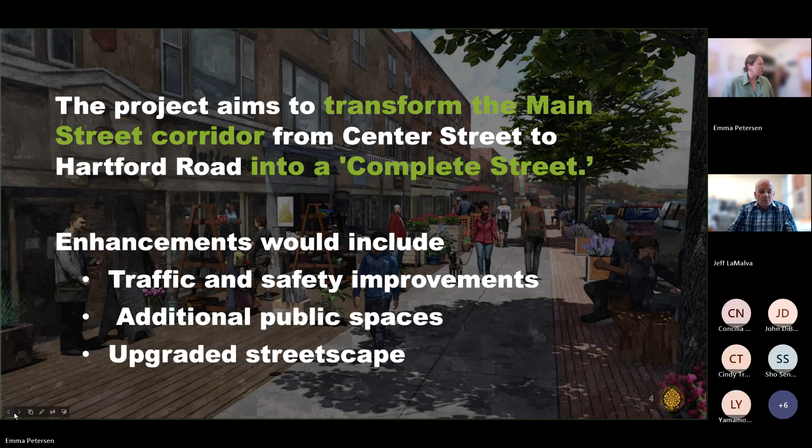There are four main goals of this project that I'd like to address to sort of level set before we get into details of the project itself. The first one being there is a need to modernize some of the infrastructure that we have downtown. There are certain elements that are in need of improvements, that I'll get into a little bit more detail later on, that are at the end of their useful life, and there are upgrades needed for downtown.

The second is improving traffic safety. Unfortunately, this section of Main Street in the downtown corridor has been identified as an area of significance in terms of the frequency and severity of crashes. And there are certain design elements that can be incorporated into the road design to address these concerns.

The other goal of this project is to advance connectivity and accessibility, which means accommodating different types of road users for our downtown district. We have a lot of visitors, a lot of people that love our downtown district, and being able to provide infrastructure that would allow people to utilize public transportation, being able to bike downtown or walk downtown, in addition to having a comfortable driving experience, is something that we strive to accomplish.

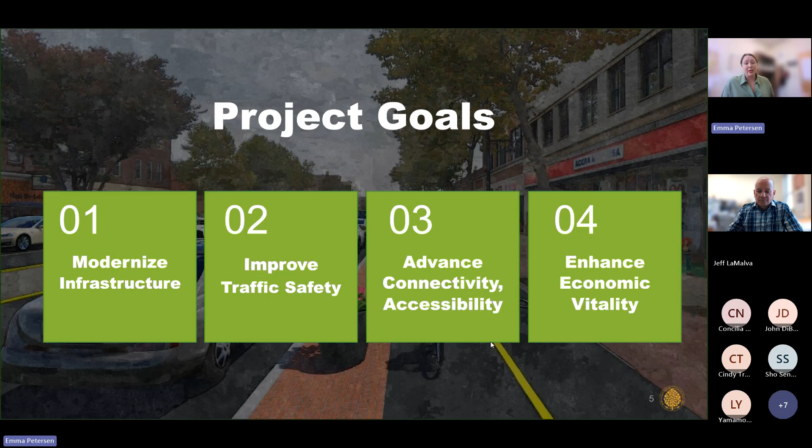And lastly, enhancing economic vitality for our downtown district. I've identified a series of investments that the town is getting ready to make downtown, and this also provides an opportunity for us to make downtown even more of a destination to visit.

So I'd also like to address some frequently asked questions as I go along, and this will just be kind of peppered into my slides here, but a couple to start off with are: does the plan remove parking spaces? No, the plan does not remove parking spaces downtown. There's no net change in on-street parking spaces, and currently there is an increase in off-street parking spaces incorporated in the draft design. Another question that we get is, are the plans set in stone?

No, this is an ongoing process. This virtual session tonight is just part of a series of engagement sessions that we've been hosting to collect feedback from residents, from businesses, from other downtown stakeholders. And all of this feedback tonight, and through these other sessions, is going into updating this draft design.

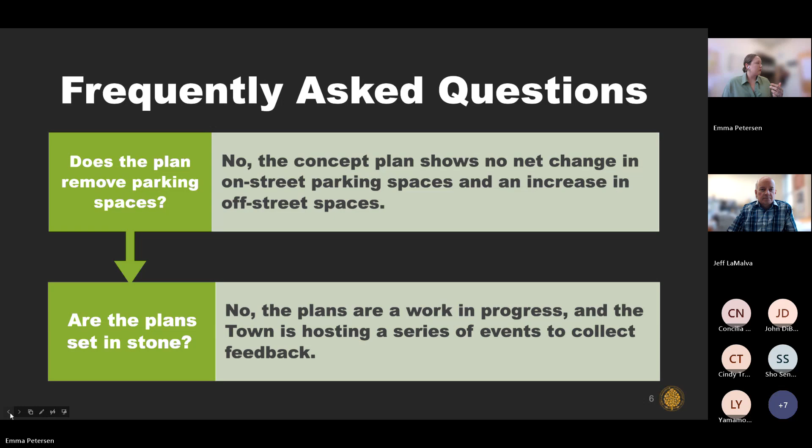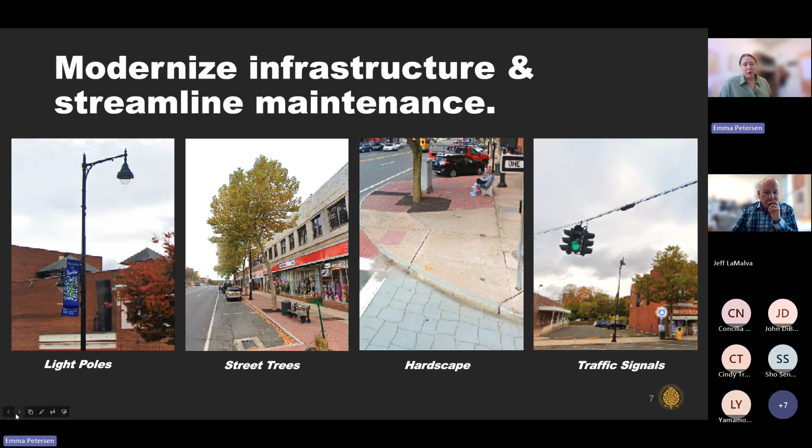To get a little bit more into those project goals, the first one is modernizing infrastructure and streamlining maintenance. There are certain elements in need of upgrading downtown, including the light poles, street trees, hardscape, and traffic signals. Some of these elements have not been updated since they were installed over 30 years ago and are coming to the end of their useful life, one of which being the traffic signals. Because of their age, they are not coordinated in the same way anymore. Upgrading these and incorporating new coordinated signals would enhance traffic flow and serve to add to the maintenance of our downtown district.

There's also our other goal of improving traffic safety. The downtown Main Street corridor has been identified as an area of significance in terms of crashes. There are well-researched design elements that can be incorporated into the streetscape layout to improve these conditions. One is known as a road diet, or roadway reconfiguration, which generally translates to having a 4-lane roadway and converting it to a 3-lane roadway, also through the incorporation of dedicated turn lanes. These are two very common elements that can have great results.

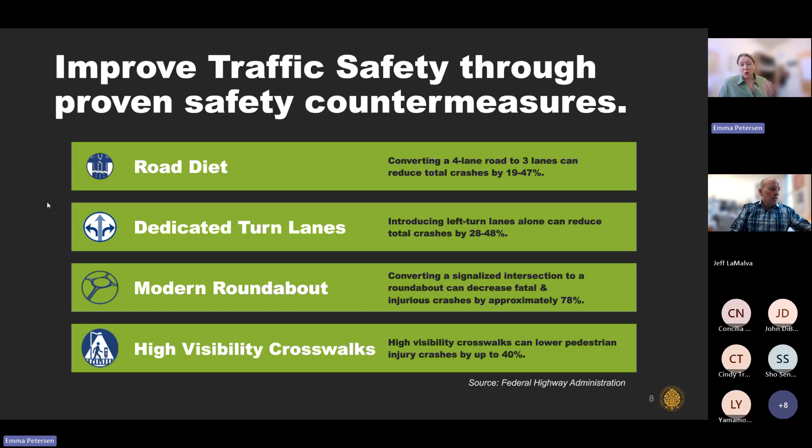A couple of statistics: converting a 4-lane road to 3 lanes can reduce total crashes by 19 to almost 50%. Introducing left turn lanes alone can reduce total crashes by 28 to 48%. This is from the Federal Highway Administration. Other elements that can be included are modern roundabouts versus rotaries - we get that question a lot. There are some key design differences there, but modern roundabouts also help reduce crashes. Another element is high visibility crosswalks, specifically for reducing pedestrian injury crashes. All of these elements are incorporated into the draft design, which we will get into in a little bit.

Another question we have: can large vehicles navigate a roundabout? Yes, large vehicles can navigate the proposed roundabout. They have been designed to accommodate emergency vehicles and large trucks. Our engineering team has done calculations and talked with stakeholders to ensure this. Another question we get is how would a roundabout compare to others in the area? The proposed one is larger than others in the area as well.

Another question that we get is, will the road diet cause traffic delays? No, that is not the intention. There is the coupling of upgrading the traffic signals and improving the roadway design so that traffic would flow smoothly down Main Street, and there would be no anticipated changes in travel times down Main Street.

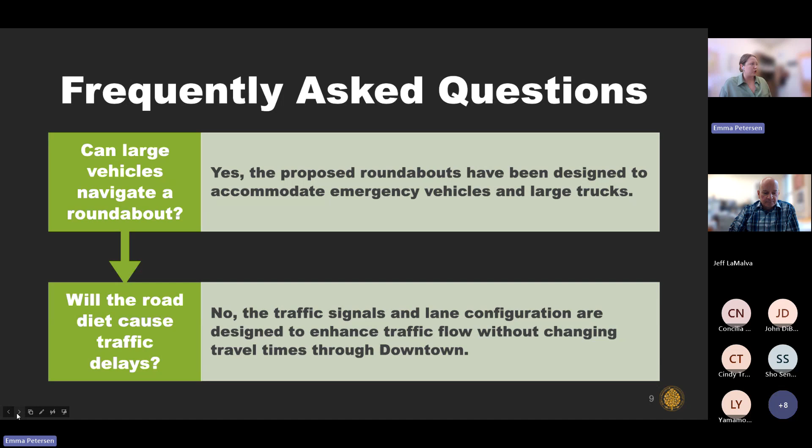Third and fourth of four goals here, to get into this in more detail: we talked about advancing connectivity and accessibility, and another way we view that is accommodating different types of road users. I talked about upgrades needed to the infrastructure downtown. There is a certain policy that the board of directors adopted in town called the Complete Streets Policy. The basis of that is that when the town looks to make improvements to our roads, the Complete Streets Policy outlines the principle that we should also look at the design of those roads and allow for opportunities to incorporate infrastructure that would allow for other types of road users - very specifically connected to pedestrians, people walking, cyclists, people biking, or using public transportation, making sure there are elements that accommodate those different things.

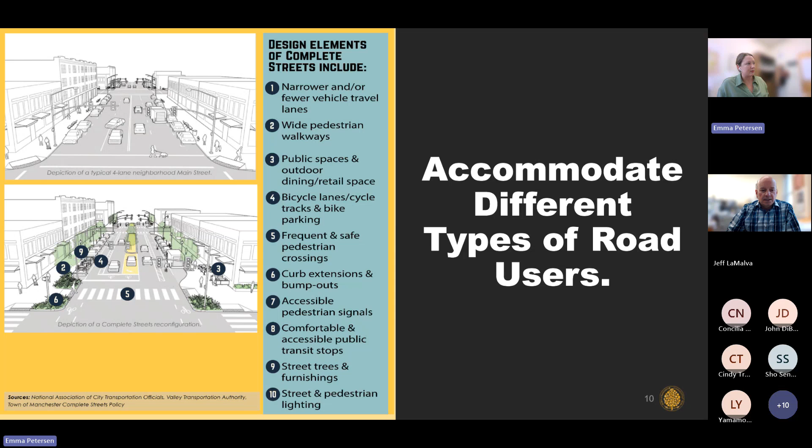So, a couple of FAQs here. There is specific bike infrastructure that's incorporated into the draft design. We do get the question, why is the cycle track included in the plan?

Very specifically connected to the goals of this project, part of the goals is to accommodate different types of road users, providing safe, dedicated structures for cyclists and other human-powered transportation, things that are slower moving than cars but separated from pedestrian traffic, like scooters or skateboards. Providing that dedicated infrastructure allows a safe way for other users to travel.

We also get the question, who would use the cycle track? We certainly see a connection with recreational cyclists. The proposed cycle track would connect with two of our popular trails in town, the East Coast Greenway and the Cheney Rail Trail.

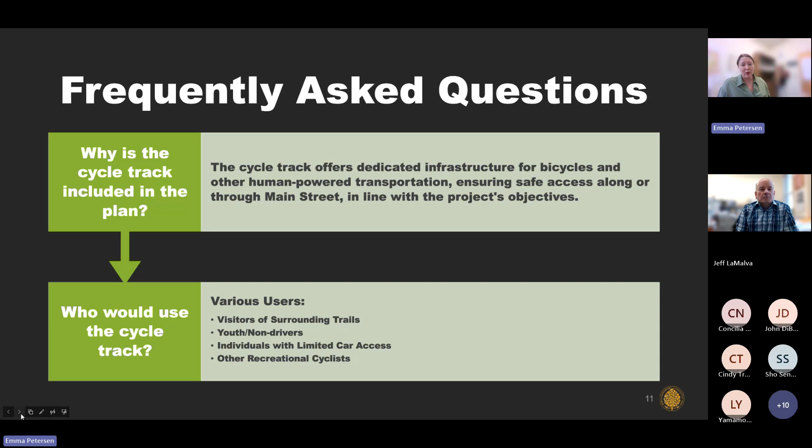So we absolutely see a connection there about people traveling from those trails to the downtown. But there are other use cases incorporated into this. We see Manchester youth being one that could utilize this, people too young to drive yet, or middle school students traveling to Bennet Academy. We also see a connection to non-drivers for any particular reason, or those with limited access to cars. There is also frequent bus transit on Main Street — having cycle infrastructure could be a way for people to get to bus stops as well.

The last item here, our last goal, we talk about enhancing economic vitality. All of these things I've mentioned are significant investments in our downtown district that address maintenance, but also address improvement. Part of those improvements could also incorporate more public features downtown.

As we look to add these different design elements, what are some other things that could add placemaking value to downtown? These could be things like outdoor dining incorporated onto wider sidewalks, decorative lighting that creates a safe walking environment but also adds aesthetic value, additional landscaping, public seating, things like that. All of these elements can be incorporated into the project so that we are not only maintaining the asset we have, but also providing improvements.

Just a couple last FAQs that we've gotten through our other events: will this proposed plan harm downtown events? No, that is not the intention at all. We are working closely with the Manchester Road Race Committee to ensure that any proposed design wouldn't interfere with the logistics of the race. There's no reason to see why another event like Cruising on Main wouldn't continue to be able to take place on our Main Street.

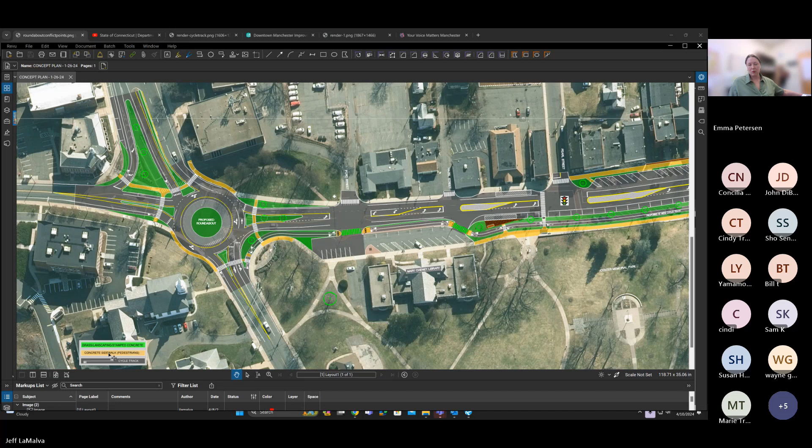For example, everything you see in green here is not necessarily grass - it could end up being grass, landscaping, stamped concrete, or another surface material. While I'm on the legend, anything you see in orange is a proposed sidewalk, and lastly, the gray pavement colored here with the bike symbols is a proposed cycle track, which we're going to get into in a bit more.

We're going to start out at the northern end of the project. The Lincoln Center is right here, Center Congregational Church here, and Mary Cheney Library here. One of the most discussed parts of the plan are the two roundabouts at each end of the project. Here we see the one at Main and Center Street.

There are a few reasons we are proposing roundabouts at these two locations, with the most important being safety. It's estimated there are over 10,000 roundabouts in the United States. The state of Connecticut currently only has 26 roundabouts, but more are in the planning stages. Roundabouts are gaining popularity because they're a proven method of reducing crashes, particularly injury and fatal crashes. Studies by the Federal Highway Administration show that roundabouts achieve a 48% reduction in total crashes and a nearly 80% drop in serious injury and deadly crashes.

How are they so effective? Well, they reduce the number of collision points, and I have a graphic here to show you that. In a typical multi-lane intersection, you can have up to 32 vehicle conflict points and 24 pedestrian conflict points, whereas in a roundabout, the way it's designed, that drops down to 8 vehicle conflict points and 8 pedestrian conflict points.

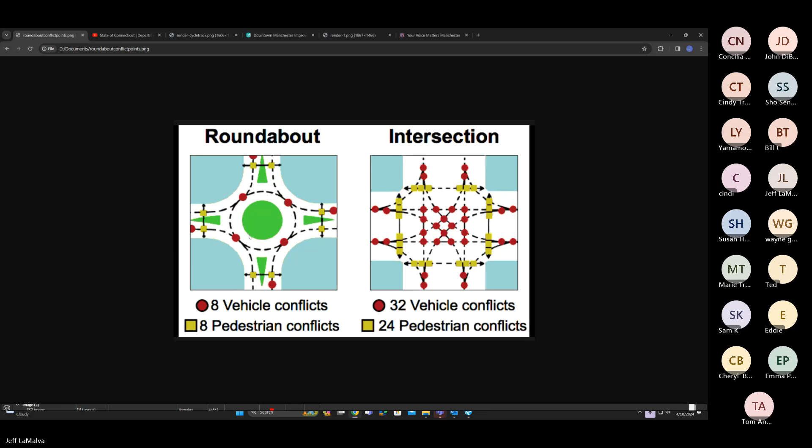You can see, more importantly, it's the geometry of the roundabout that practically eliminates the type of serious crashes like head-on and T-bone types. I'm going to go back to the screen here.

Other benefits of roundabouts are that they move traffic more efficiently because traffic is always moving. Studies show that roundabouts reduce vehicle emissions and fuel consumption by 30% or more. Lastly, it provides a great opportunity for some gateway landscaping and signs to bookend the downtown area by slowing traffic before it enters downtown.

There's been some misinformation floating around on social media that I would like to address, and Emma did bring it up - that is the maneuverability through the roundabouts and the fear that tractor trailers or, worse, emergency vehicles can't get through them. This is not true. These roundabouts are on state right-of-way and will need to be reviewed and approved by the state to make sure they conform to their standards, and those standards include that the design must accommodate emergency vehicles and large tractor trailers.

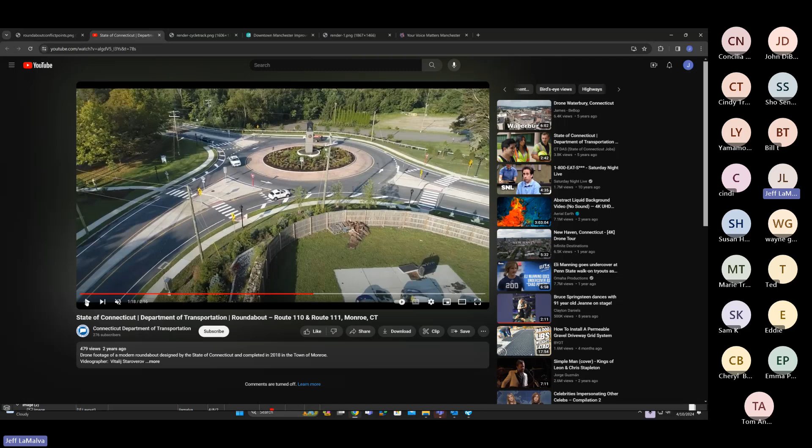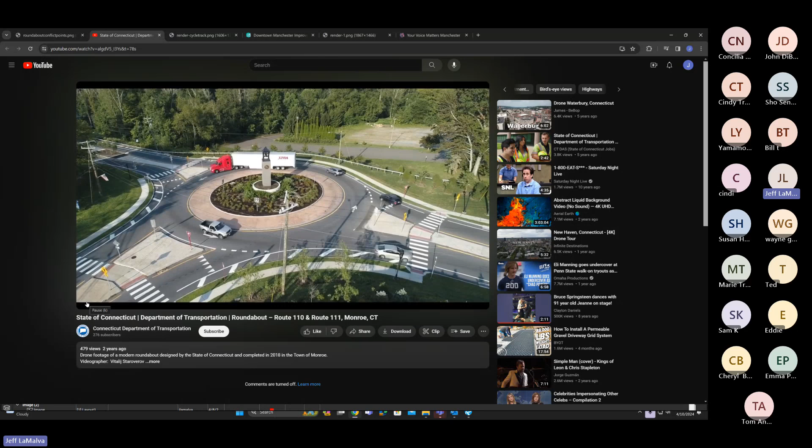Roundabouts use what are called truck aprons, which are designated areas along the inner circle, right here, and they're designed for wheel tracking of larger vehicles. I actually have a video here of a recently constructed one in Connecticut that shows exactly how a tractor trailer maneuvers around a roundabout. You'll notice the front of the vehicle stays in the main line while the rear of the vehicle tracks over that truck apron.

For those of you who have been through the 2 roundabouts in Glastonbury, we want to point out that the ones proposed under this project are approximately 20% larger than those in Glastonbury, more in line with the size you just saw in that video. I recommend visiting our project story map, which we'll provide a link to, for more information and details about roundabouts.

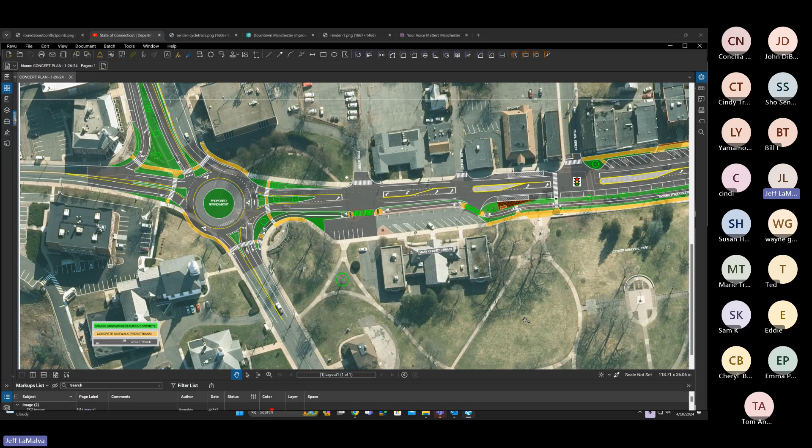All right, enough about roundabouts. Let's continue south. The next feature of the plan is the proposed road diet - going from 2 lanes in each direction to 1 lane in each direction with dedicated turn lanes. The lane widths and shoulder or buffer widths will remain the same. Road diets are another proven way to calm traffic speeds and reduce crashes.

The proposed lane arrangement will eliminate the weaving of traffic around people turning left in front of them, and will also minimize crashes caused by screening or blocking of sight lines to the second lane of traffic while either backing out of an angled parking stall or as a pedestrian crossing the street.

I noted that it's hard to comprehend that reducing lane capacity by 25% won't adversely impact traffic. But also included in this project is the replacement of all 7 traffic signals on the Main Street corridor. These will be replaced with a highly sophisticated, coordinated signal system that adapts to changing traffic patterns, which, coupled with efficiency gains from reducing weaving traffic, will offset that reduction in lane capacity.

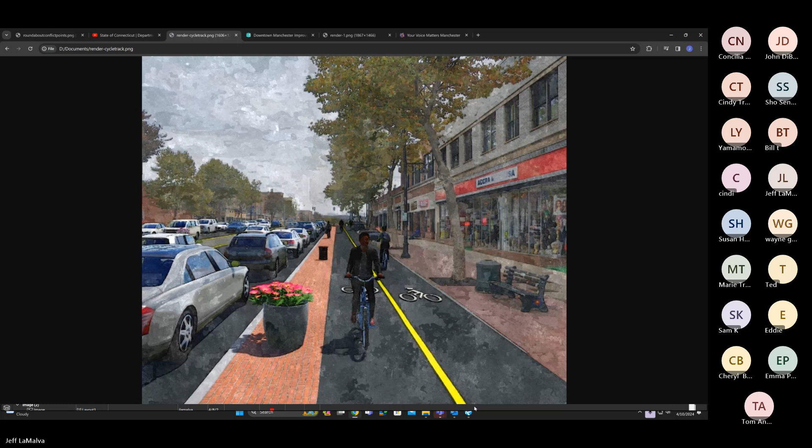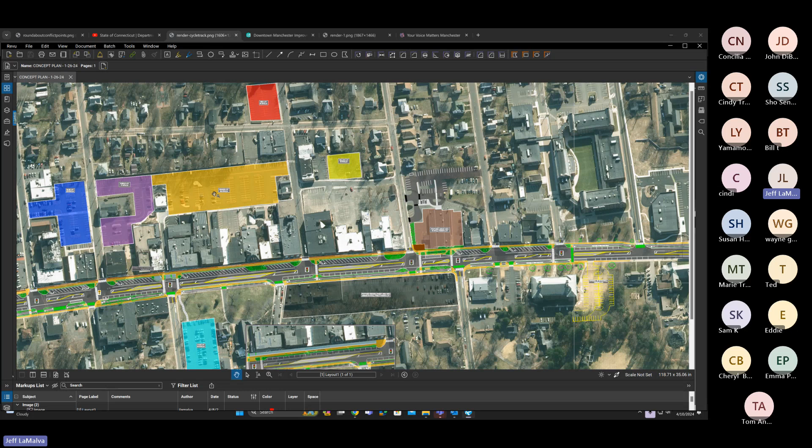Emma did touch upon it, but it's important to note that this proposed plan does not decrease the total amount of on-street parking. Let's start with the east side of Main Street. As you see here, all of the angled parking that exists now is shown in this proposed plan.

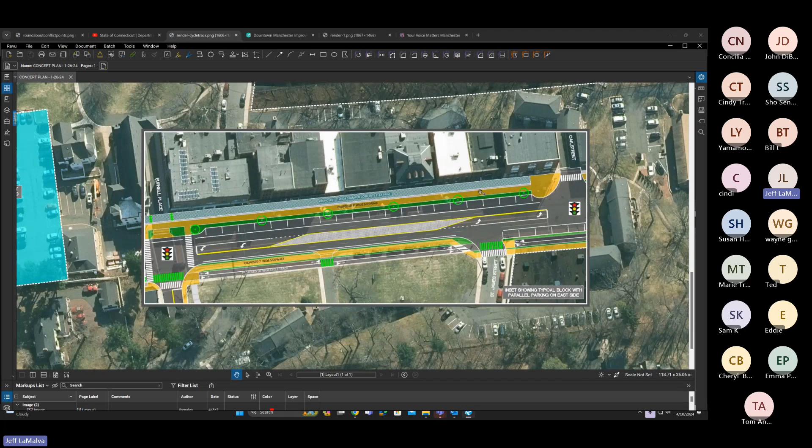However, we are showing an option to convert to parallel parking and gain additional space for businesses to use for outdoor dining, retail displays, or other uses. We show that as an inset block here - this is what it could look like in any particular block. If you changed from angled to parallel parking, you'd gain an additional 12 feet of space to use.

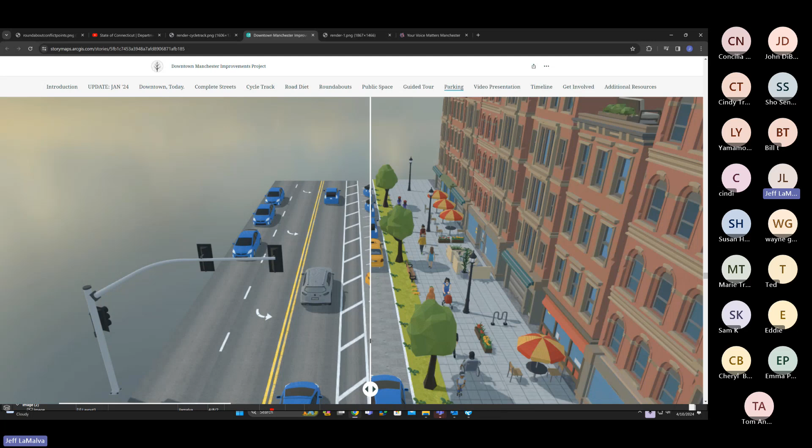Let me flip to the slider here. On our downtown story map, we have a feature where you can see the difference between angled parking and parallel. You can see you gain some additional space in front of the businesses, some more pedestrian walkways. That's essentially one of the renderings we had initially - it's this additional space shown in brown.

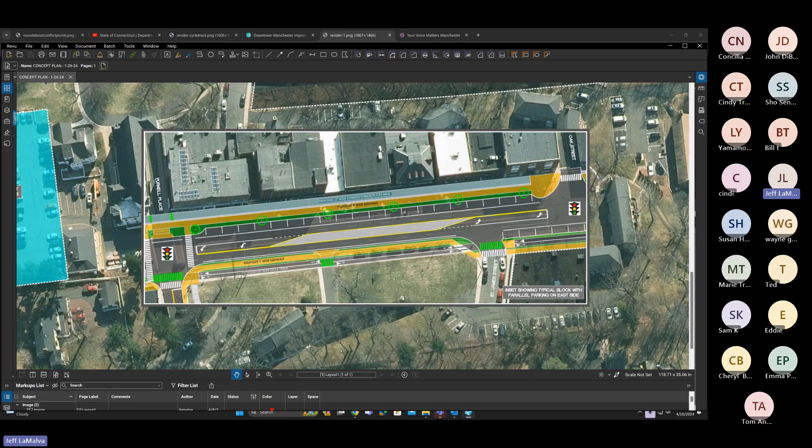That would be the gain. However, this is an optional part of the plan, so we'd really like to hear feedback from you on which of the two you like. We've gotten feedback from businesses, but we'd also want to hear from you. It could be done on a block by block basis, not an all or nothing thing. I did want to show you the pros and cons of doing it both ways.

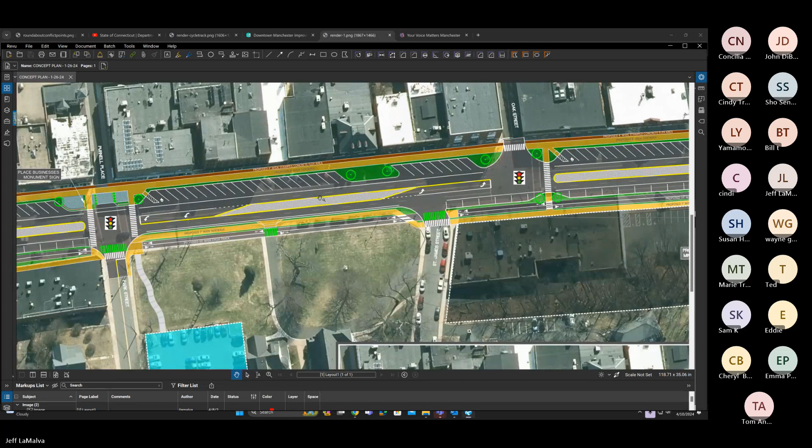So moving to the west side of Main Street. Right now there is a mix of angled parking and parallel parking on the west side. We're proposing to change the angled parking on this side to all parallel parking. The net result is the same amount of parking, it's just now spread out more evenly along the corridor.

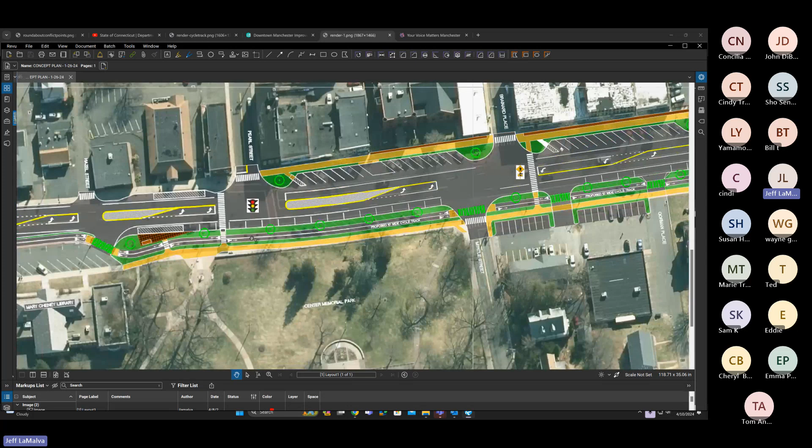For example, up near Center Memorial Park, you can somewhat see it through the plan here. There's angled parking here, and then you have some bump outs. It's kind of the way it is all the way down. We're proposing doing consistent parallel parking along that row.

Lastly, I'd like to point out some additional off-street parking that is proposed further down at the southern end of the project. The town of Manchester owns a lot across from the Bennett School, south of the Bennett Apartments. We're showing here that there's an option to construct up to 68 additional public parking stalls for use by the public for downtown.

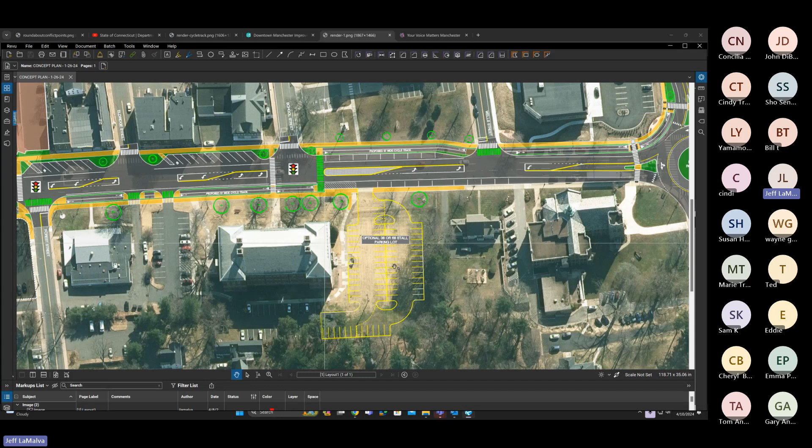While we're in this area, I do want to look at two other projects that are separate from this project, but very much a part of the overall vision for downtown. The new library, which was approved by voters in 2022, is here at the corner of Main Street and Maple Street. This project includes construction of a 3-story library with off-street parking in the rear. The project is currently in design and expected to be completed in January 2026.

More information can be found at the Manchester's Your Voice Matters webpage, which is right here. So if you go to the Your Voice Matters webpage, you can see here's the library project, here's the downtown project. Click on these and you'll find a lot more information on each of these projects.

Across the street, you'll notice this hatched area here. That is another development opportunity at the former Tong Building and Forest Street parking lot. The town will solicit proposals from private developers to develop this property with a caveat of maintaining a minimum number of off-street public parking spaces. It is likely this solicitation will occur later this year after the building is demolished.

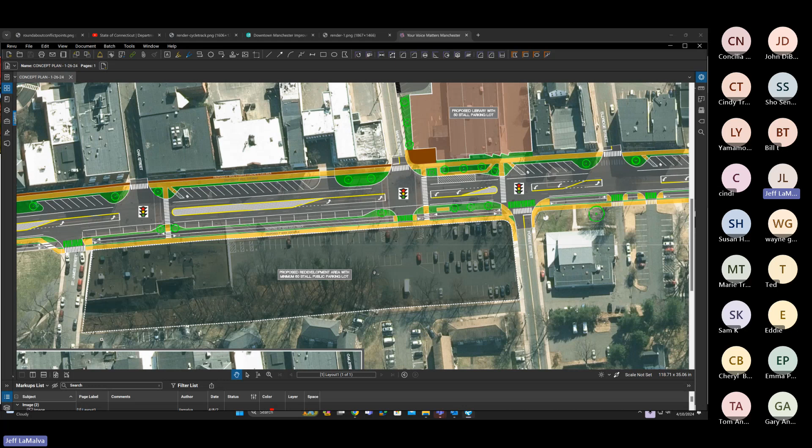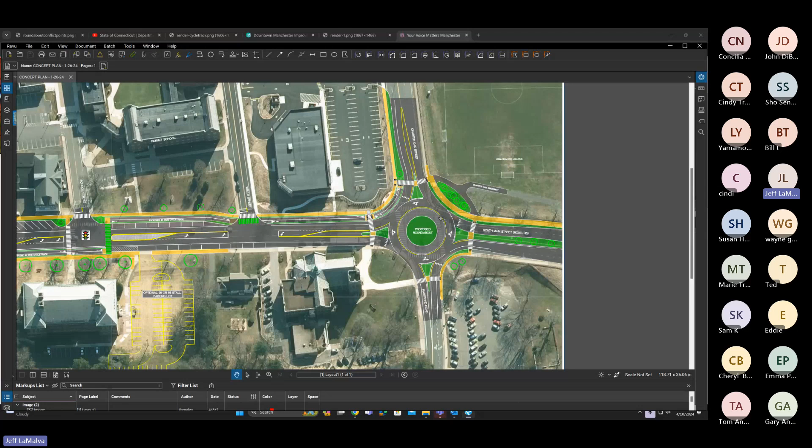And finally, at the southern end of the project is the second roundabout. This one is similar in size to the one proposed at Main and Center Street. That concludes the walkthrough of our plan. I'm going to hand it back to Emma to facilitate some questions.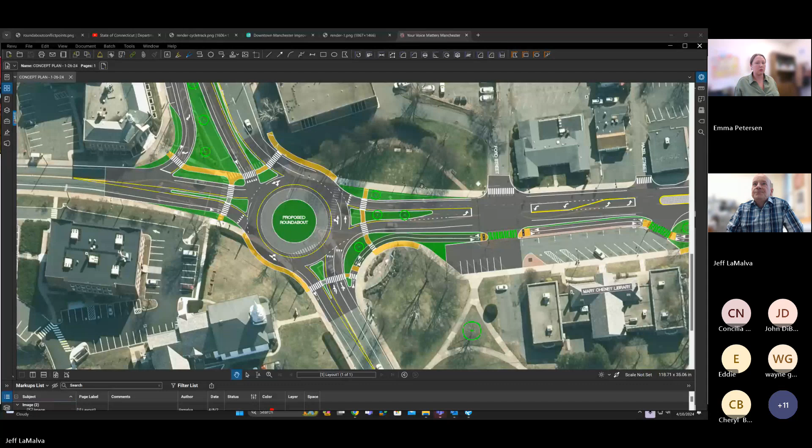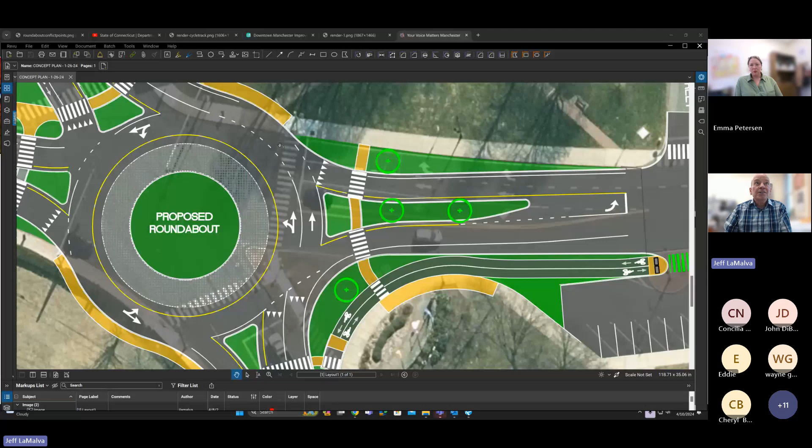So the question is, how does a pedestrian move about a roundabout? The answer is you traverse around the outside using the sidewalk, shown here in orange. Essentially, one benefit of a roundabout is that you're only crossing one lane at a time. This particular roundabout at Main and Center does show two lanes for about half of it. It may or may not end up that way, but at most it would be two lanes. Primarily, you'd cross one lane at a time.

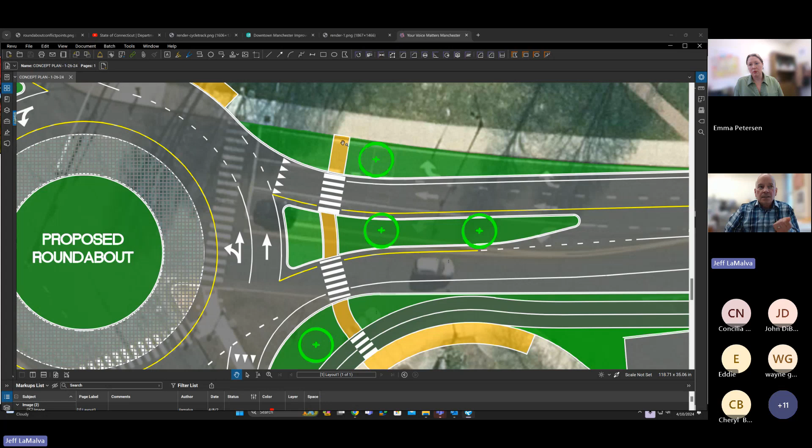Then you get into the median island, which is a protected island. Again, you cross one lane at a time, looking in the direction of traffic. Each of these crossings will have push button strobe lights, like you see downtown, I believe on Myrtle Street.

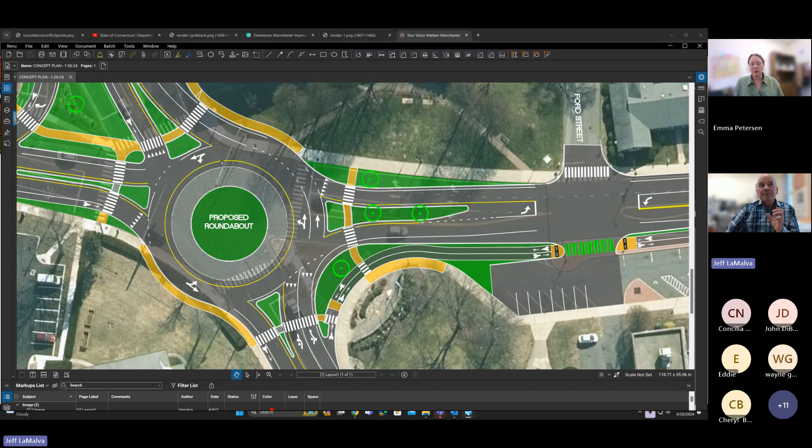The reason roundabouts are actually safer and proven to be safer is that at these crossings, you're crossing where traffic is going slower than it would at an intersection. Roundabouts are designed so that, as you approach, the lanes are aligned to make you slow down. You enter at about 15 miles per hour, and once in the roundabout, that's about the max speed without driving off the road. So roundabouts force you to reduce speed, and the pedestrian crossings happen where vehicles are already slowing down to yield anyway. I hope that answers your question.

Another question we received is about how someone who hasn't used a roundabout before would learn to navigate it. You started to touch on that with how the roundabout design slows vehicles before they enter. Can you touch on the actual movement of the car itself through the roundabout again? That's what I'm getting at.

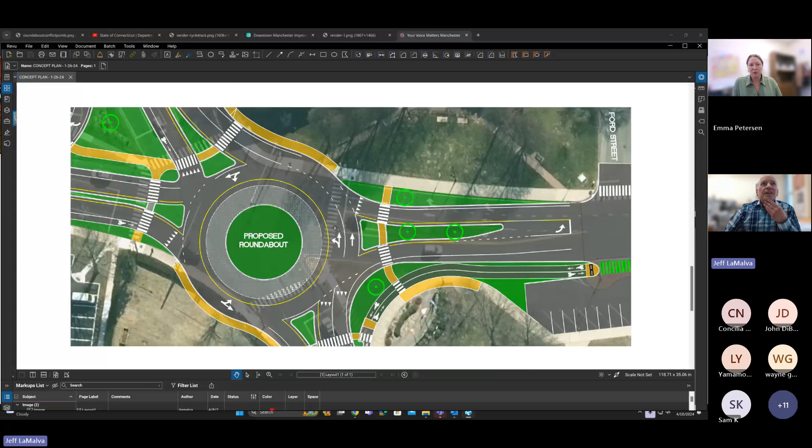Sure, let me share it again. All traffic entering the roundabout essentially yields to the person already in the roundabout. Once you're in the roundabout, you have the right of way, so vehicles coming in have to yield to you.

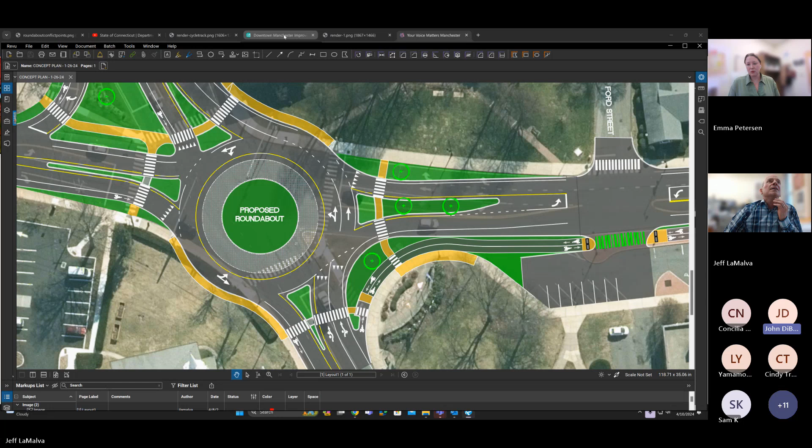As far as, John, do you remember on our story map—I think there was an informational video presentation about roundabouts. I believe there is, along with a couple of brochures that Connecticut DOT has handed out with information for users. I do recommend, if you go to the project webpage, there's what we call the story map with a lot of information. You can see this top tab and scroll through all the different aspects of it, and under roundabouts we have links to...

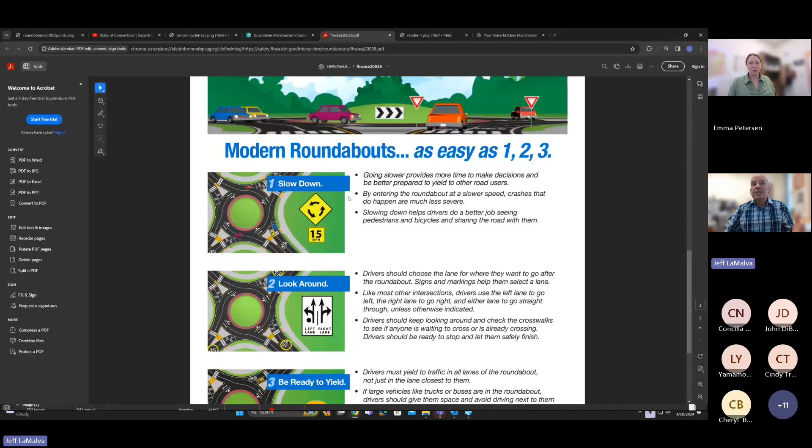FHWA, do you know the rules of roundabouts? There were some other resources that go through exactly what you're talking about—how do you use a roundabout. Essentially, you slow down, look around, and be ready to yield. It really is that simple, and simple by design. In fact, roundabouts are built so the center island blocks sightlines across the intersection, because you want the driver focused only on the person in the roundabout circle.

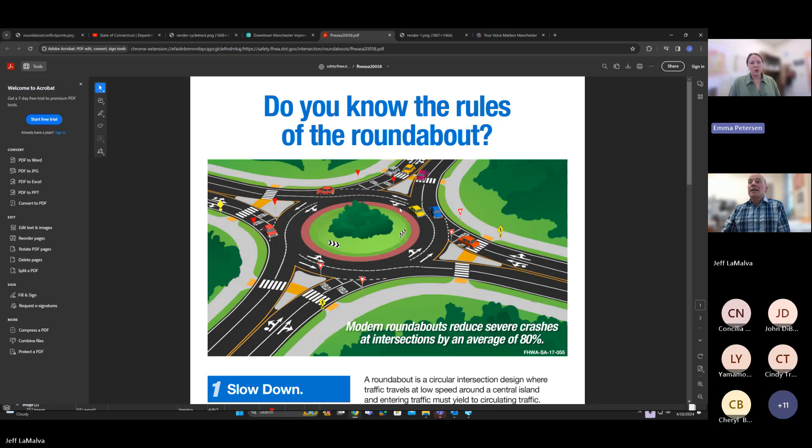That gets to what I was trying to start with this conversation. Vehicles are slowing as they enter. Vehicles entering the roundabout yield to those already in the center. There are clear sight lines to vehicles that need to be concerned about. There is a design change from a signalized intersection, but not one that hasn't been integrated in other communities close to ours.

Another question we have is about the grant that was received for this project—can the grant be used for something else, for another project? The grant is specifically intended to fund the streetscape project on Main Street. That was how the application was worded and the intention of the grant, and it was in line with what the grant was available for. It was the Community Investment Fund with the state of Connecticut, which is a benefit to residents. We are seeking grant funding for this project, but there are parameters around what the funds could and could not be used for. So I just wanted to make sure to answer that question.

Another question we have is how do bus stops interact with the flow of traffic with this proposed design? Sure, Jeff, can I have you take this one? Yeah, yes, yep.

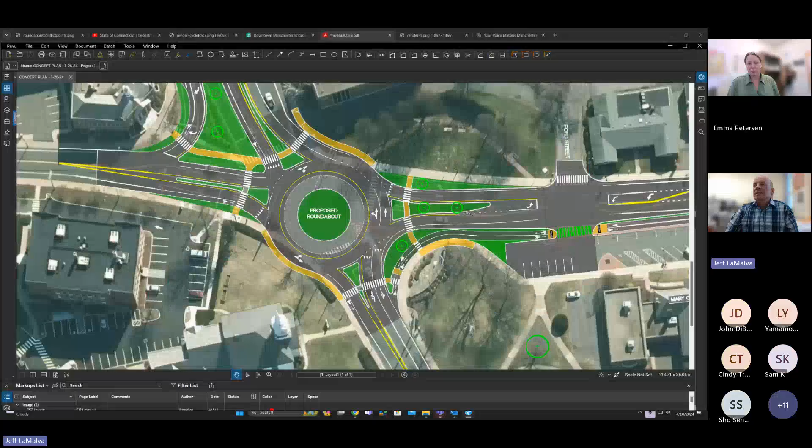So at the concept level, we are showing some areas with potential pull-offs for buses, but we really want to look at the corridor overall, and not just buses, but deliveries, buses, ride share, consolidating some of these. We're trying to get away from the massive, 80-foot long, 12-foot wide concrete bus pull-offs that are there now, used maybe once every hour or two, and consolidate with a little bit more efficient design. But to answer the question, there will still be areas to pull off outside of the travel lane for buses.

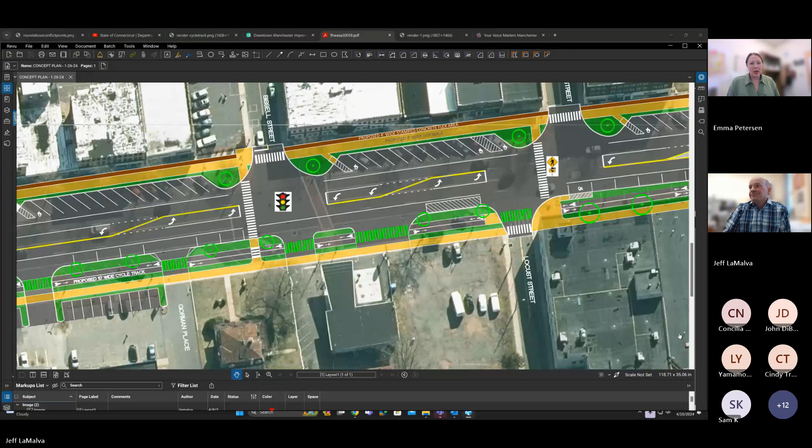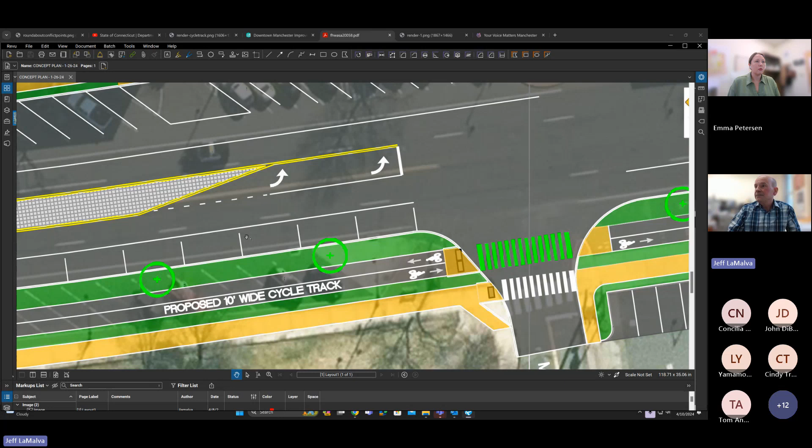And there's another question that gets the same effect, how cars can navigate around people pulling into a parallel space. So it's the same thing - the parallel space is here. Now these parallel spaces are actually a little bit larger than others. It's a 9-foot wide space, and then you have another 2-foot buffer area between that and the shoulder. So that's 11 feet. The average car width is about a little over 5 feet. So there's definitely enough room to safely exit vehicles on either side to get in and out.

Where you are backing in, there are places where you might have to stop and wait, but there's also a lot more.

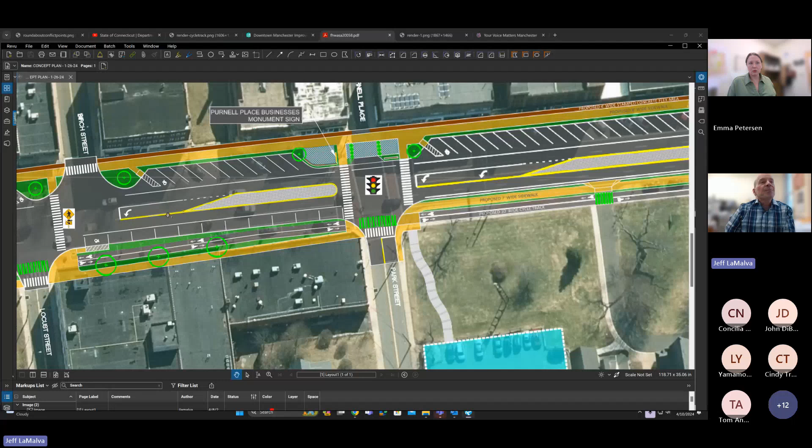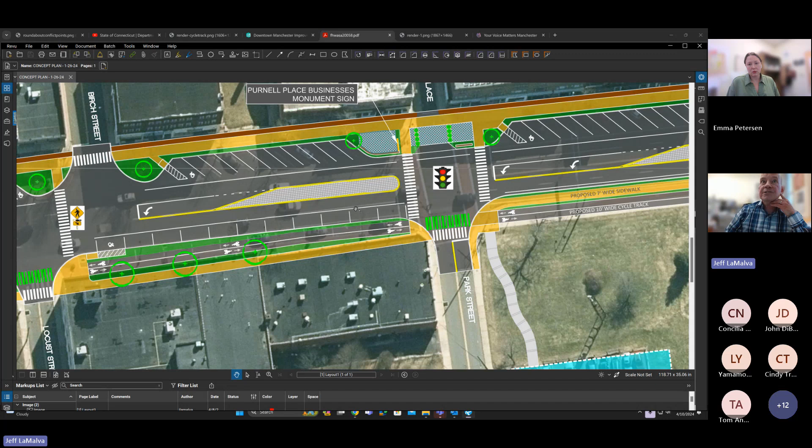So in the third travel lane, which are the left turning lanes, you have spaces like this, which we're just showing with this hatch pattern. Those are not raised medians, those are flush medians, and they're just going to be essentially a different surface treatment - think of maybe something like on Broad Street where we have the stamped asphalt for the crosswalks. It could be paint, but essentially they're drivable. So if somebody is backing in here, you could drive and bypass that vehicle by driving a little bit over onto that, as well as for emergency vehicles - if cars are stopped, they'd be able to access and drive over that as well.

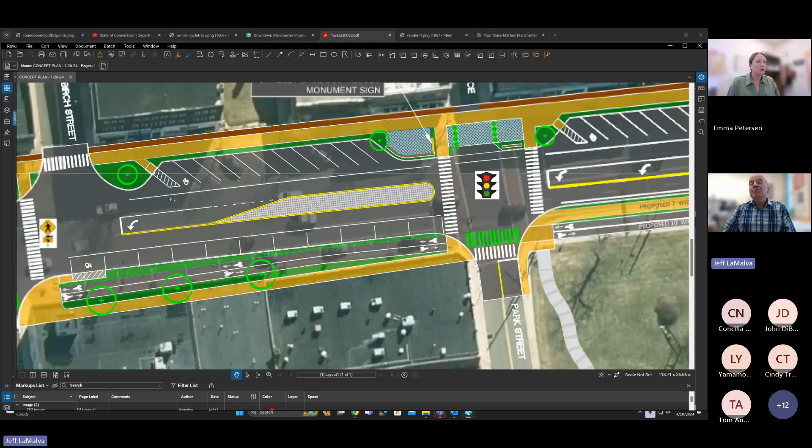So between the buffer areas we have in here, we actually have a larger buffer of, I think it's 5 to 6 feet, between the angled parking and the travel lane. Those should provide enough buffer area to be able to safely bypass and not just hold up traffic.

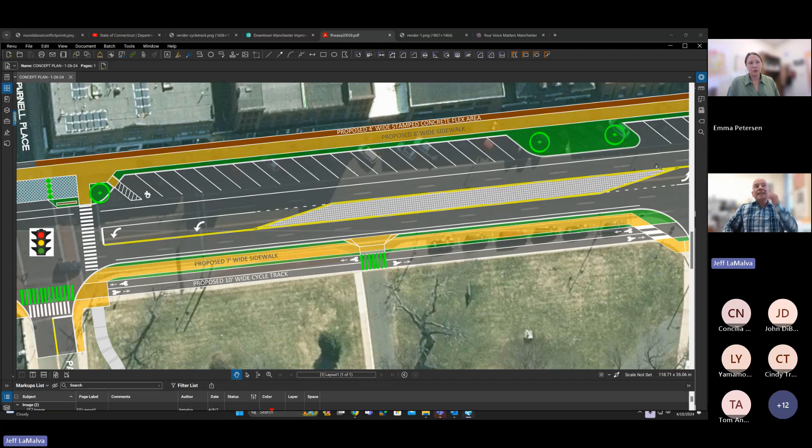Now, I did see a question about backing out of an angle spot, and the comment said it would be more dangerous. I actually think it would be safer because now you're backing out into one lane of traffic, not two, and that's one of the things I touched upon with the screening. Right now, if you have 2 lanes of traffic and you're backing out, you could be screened - meaning a car in the right lane could stop, but you can't really see behind them and see what the person in the far left lane is doing. That's where we get a lot of the crashes that we see related to angled parking.

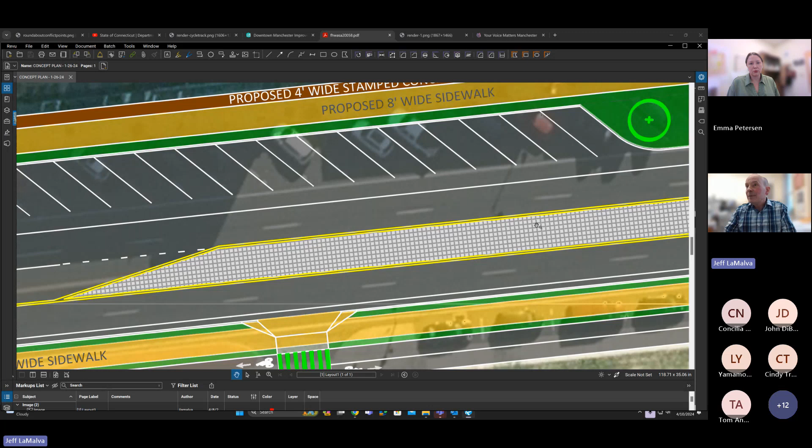So between backing out into one lane of traffic, and again that additional buffer area we're showing, a lot of vehicles will be able to back out and actually turn without even entering this lane. Whereas now you have to back right out into that lane. So hopefully that answers those questions.

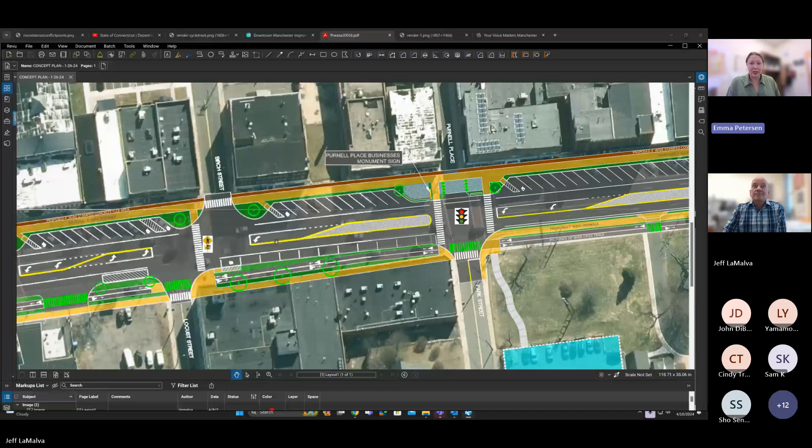And speaking of buffer areas and cars navigating around other obstacles, there are a couple other points I want to address about roundabouts - they're sort of later on in the questions. Someone had a question about if cars are in the roundabout and now an emergency vehicle has to enter, how does that work? That gets back to the space with the truck apron and having flexible space for cars to possibly navigate. Could you just touch on that again? I want to make sure we're getting to all the points about roundabouts before I move on.

Yeah, absolutely. So again, here's a look at the roundabout.

The green area is the actual raised portion of the roundabout, so that is not traversable. That's where it would be built up, landscaped, things like that. This other hatched area here is that truck apron shown in that video - it's essentially this piece right here. And then you have your lane. On ours, the width from here to here, I believe, is at least 26 feet wide - plenty of room for a car.

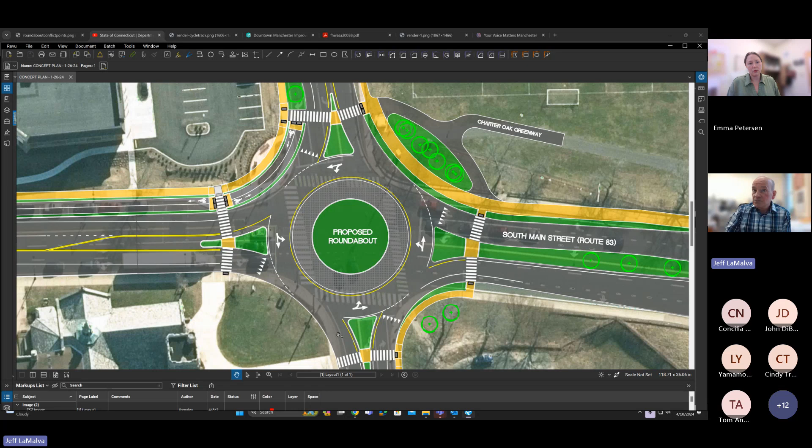Now, the normal process is that if you're in the roundabout and you see an emergency vehicle coming, you try to exit the roundabout. But in the off case that you can't and you have to stop, emergency vehicles can still get around you because of that extra truck apron. That truck apron is a flexible space that could be used for an emergency vehicle to navigate around the car, but it has a texture - it's slightly raised and doesn't look like a travel lane. So it's not a case where somebody would use that as a regular travel lane, it's just flexible space for that specific instance.

I just want to make the connection to those other flexible spaces incorporated in the design, so that people can navigate around. And one more point - even at what we call the splitter islands, these are raised islands, but if you look here, look at this car, he's still got about 3 more feet to pull over. You can see there's still plenty of room for an emergency vehicle to get by them, even if they stopped right at the splitter island.

Another question I want to bring up to consolidate this while we're on roundabouts - someone asked about pedestrian crossings: will it be up to the driver at a roundabout to stop and let the person cross? We had talked about pedestrians crossing one lane of traffic at a time, having the RRFBs or strobing lights that pedestrians can use to cross. Also, cars entering the roundabout will be at significantly reduced speeds - I think 15 miles an hour. So all of those things combined, yes, the car will have to stop for a pedestrian - the car must yield to pedestrians when they're crossing. There'll be visual cues, significantly reduced speeds. At a signalized intersection you have the red light and cross signal, but the conditions here will be favorable for someone to stop and look for a pedestrian.

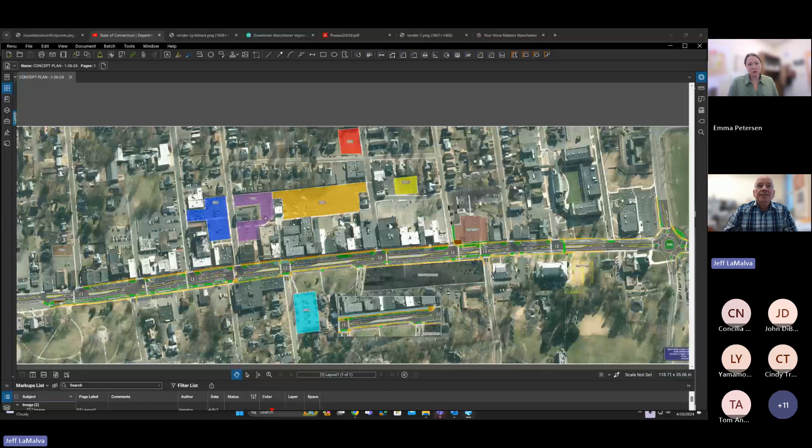That is a great point, because we actually did look at that, but unfortunately we don't have enough continuous right of way to completely move the cycle track off of Main Street in the rear of the building. So the colored lots are what we own, but many of these are private lots. Even once you get up to Bissell Street, there's no way of continuing further. That's not to say we can't add spurs like Emma has talked about. We've gotten some great feedback about connections up Park Street, and connections to the Cheney Historic Area via Forest Street, and those are all things we definitely have on our radar.

The question is whether it will be included in this plan or not. That's to be determined, but like Emma said, the goal is to at least get the path along the Main Street corridor at this time. I appreciate the way you phrased that, because it's absolutely been a part of the question. With the project's goals, we're looking to have infrastructure on Main Street for the purpose of accommodating multiple users, but there's more connections to be made for sure.

Another question here - one I can address quickly is someone asking about cost and local funding. How much is this going to cost local taxpayers? We've received partial grant funding in the amount of $7.5 million, and the project team anticipates pursuing other grants for the remainder of the funds, so that's the funding strategy there. No plan to use local funds for that.

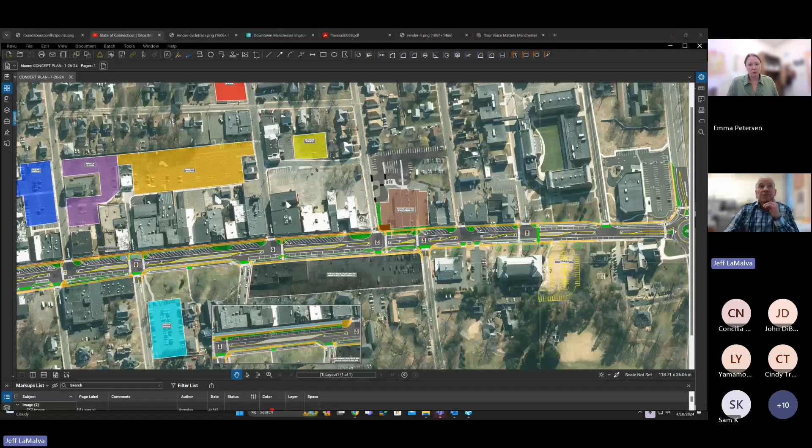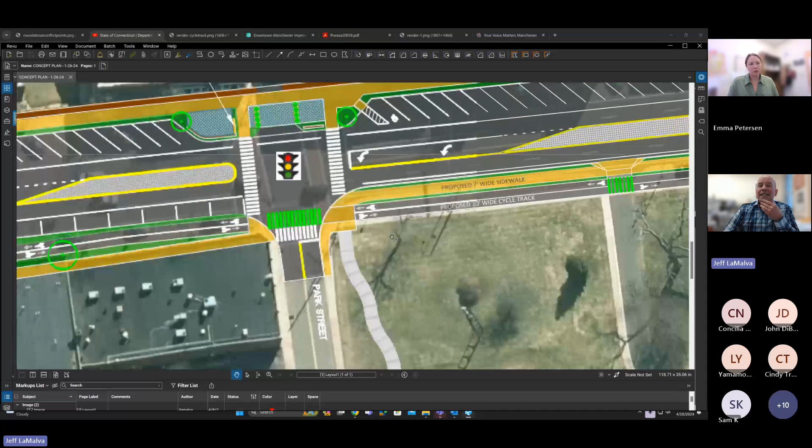You want to build on that, Jeff? The only thing I would add - I'm not sure what particular restrictions there are going to be, other than being a non-motorized vehicle. I'm not sure exactly if they consider that a motorized vehicle or not. But in general, we are going to have as many features as possible to show that this isn't the Charter Oak Greenway where you have wide open spaces and you can just essentially bike as fast as you want. This is a downtown urban area. We'll have crosswalks identified, we'll have signs, but the reality is that this cycle track is going to be a little bit different than the Charter Oak Greenway.

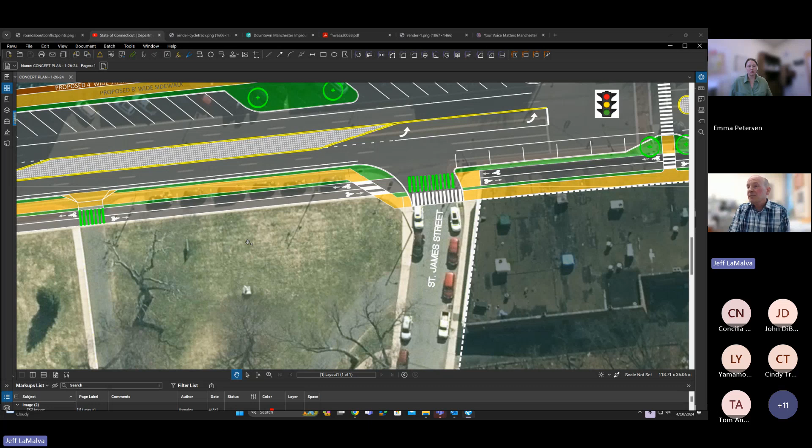It's not going to be that wide, but physically - let me just go back to the rendering. You can see here you're going to have light poles, stop signs, a lot more people right next to you. So I think just that feeling of the perspective is going to make people kind of slow down on their bikes, as opposed to being wide out in the forest on the greenway. And we're going to do as much on the design side to try to make it that way as well.

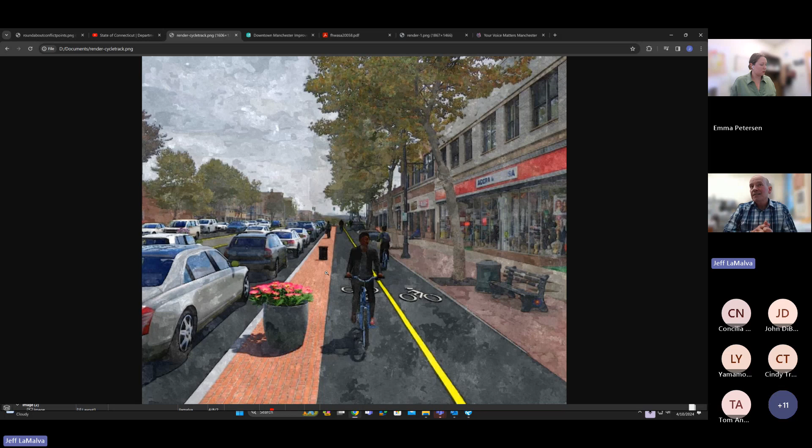Sorry, I'm just looking through our questions here again. We have a couple questions here that deal with traffic calming and traffic enforcement.

There's a question: are there any plans for additional traffic calming on Spruce Street in conjunction with these plans? Now, the project parameters we're talking about today are specifically on Main Street between the intersection of Center Street and Hartford Road. I don't know, Jeff, if there's anything you can touch on regarding initiatives outside of this project that get to extra traffic calming measures.

Exactly, this project, no, but you may have heard we do have initiatives in town that are low cost. Like, for instance, you may see more of the speed feedback signs recently out on some of the roadways.

Specifically for Spruce Street, there's an initiative that was brought up at the last board meeting with the Nathan Hale site. Part of that will be improvements to the roadway in front of that, to create essentially what we're calling a raised intersection speed table, and some other elements to do the traffic calming, but also to be an amenity for a lot of the events held over at that site.